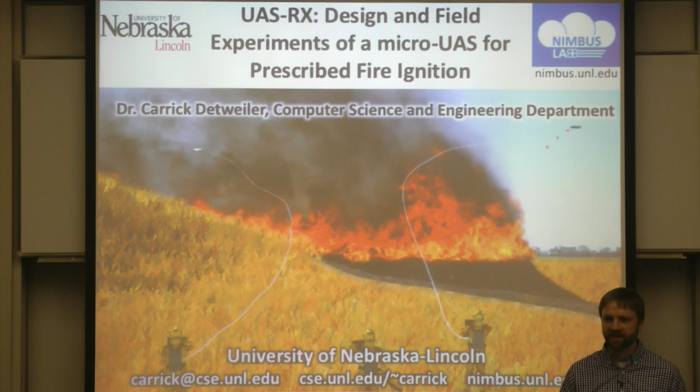Thanks, Steve. My name is Carrick Detweiler. I'm an associate professor at the University of Nebraska. Today I'm going to start out by talking primarily about some recent work we've been doing in actually starting fires with drones. But before I talk about that—and we're trying to start fires for good reasons—I want to give a little background on wildfires and prescribed fires and why these are challenging and important things to work on. Then at the end of the talk, I'll also talk about some other work we're doing in my lab related to field robotics, but also some techniques we've been developing on the software engineering side to ensure that the software we develop as roboticists actually does what we want it to do, and that we can quickly identify and correct any bugs we may introduce.

So a little bit about wildfire. This is a huge problem in the United States, also worldwide. It's a growing problem. You hear now, not just in the summer but all year round, about wildfires, especially out west, that are just decimating areas. It's extremely dangerous, not only for the property and people who are there, but also for the firefighters who are involved.

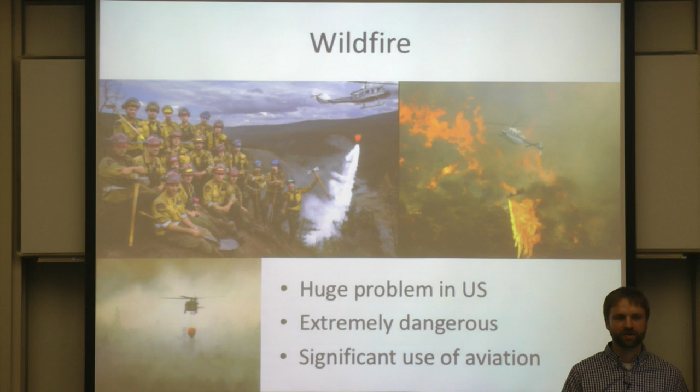They make huge use of aviation—about 20% or 25% of the costs of fighting wildfires relate to aviation. These are wildfires, so things that are basically caused when somebody throws a cigarette out of their car, or forgets to really put out their campfire, or just parks their car too long over a grassy field, and the heat from the car can ignite these wildfires. Lightning strikes are the natural causes.

Wildfire is something that naturally occurs and has occurred, and now we're actually seeing an increase in use of prescribed fire, which is where you're on purpose going out and lighting fields on fire. In part, this has become an important land management technique, because this is what naturally happened—lightning would strike and fields and forests would burn, and this would happen on a 5 to 10 year cycle. So every 5 to 10 years, most of the forests in the western part of the country and all of the grass in Nebraska would be burned off, and this was just part of the natural ecosystem.

But as people moved into these areas, we don't like fire. We try to stop it. And this has led to these bad effects. So the increase in wildfire, while it's also coupled with global warming, is also tightly coupled with the fact that we've prevented fires on these lands for too long.

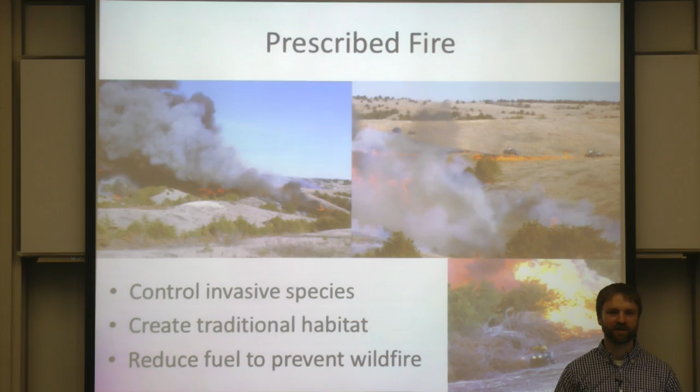In Nebraska and elsewhere, it turns out there are a lot of invasive species that were previously managed by fire. In these pictures, all of these green trees are red cedar, considered an invasive species in Nebraska and elsewhere in the Midwest. They would basically grow everywhere if we didn't spend a lot of time mechanically cutting them down, or the better way to get rid of them is to burn them, because they burn quite readily. So fire, while it can occur in what we consider wildfires, which are often viewed as bad, is a critical part of the ecosystem, and now we're seeing increased use of prescribed fire as a way to manage these.

But there are significant costs associated with these. Fighting wildfires and using prescribed fire costs about $3.7 billion a year as a country. But if you look at the larger economic impact, it goes anywhere from 50 to 100 billion to, some say, $200 billion of economic impact in terms of houses burned down, but also the resulting impact of having people evacuate. So this is huge cost.

As I said before, 20 to 25% of the costs here are associated with aviation, and in part that's a high cost because getting a helicopter out there is very expensive.

While they're very expensive, these types of helicopters and crews are often not available when you need them, just because there are so few of them. And beyond the economic and property costs, this is a high-risk activity. 15 to 20 people die each year—firefighters fighting fires, but also firefighters lighting prescribed fires, which is relatively safe compared to fighting wildfires but still dangerous. About 25% of these deaths relate to aviation.

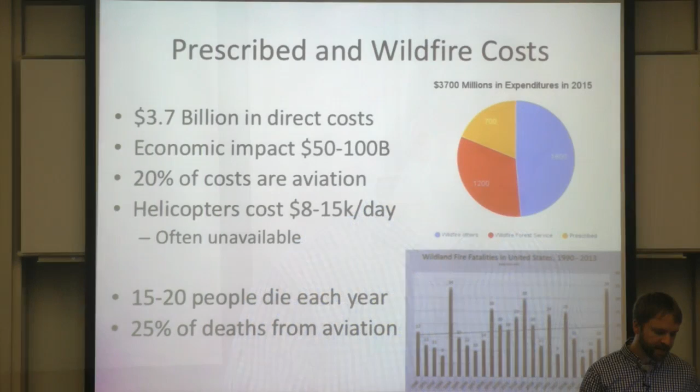So what we've been working on is the development of an unmanned aerial vehicle that can really try to remove people from these dangerous situations.

So this is a prescribed fire that we worked on with a group of landowners. Here, in this area surrounded by fire, all this dark is the smoke from the cloud—this guy is driving an ATV with a drip torch to ignite this interior portion of the prescribed fire.

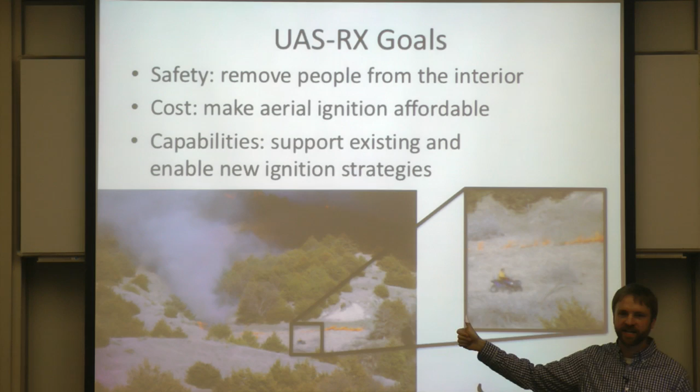So this guy, okay, these people like to do this, some of them. Actually one of the firefighters told me he'd either be in jail for being a pyro or he gets to light fire as his job. So some of these people like to do this, but this is extremely dangerous.

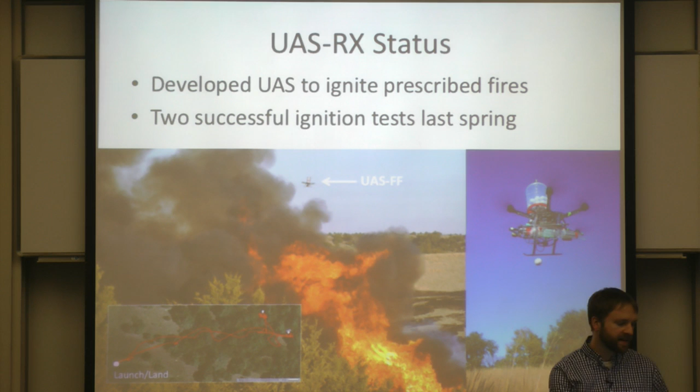So what we've done is developed this UAS, or UAV, that can actually ignite these prescribed fires. Last spring we did the first successful outdoor test of this—the first test ever of an unmanned vehicle to actually ignite fires. What I want to talk about today is a bit about how this project got started, and then go into some details of our field trials and how the design of the system has evolved over time.

Hopefully as field robotics people, or just people interested in robotics in general, you can learn a little bit about the evolution of this and how this project came to be. And then I'll also talk about a few other projects and what we're doing in the future.

So it turned out that the way we got started on this project was actually related to a different project we were working on: aerial water sampling. This is a video of how you traditionally sample—looking for another invasive species of mussels. They do these little tow net things where they throw these out and look for the veligers, the little almost microscopic baby mussels.

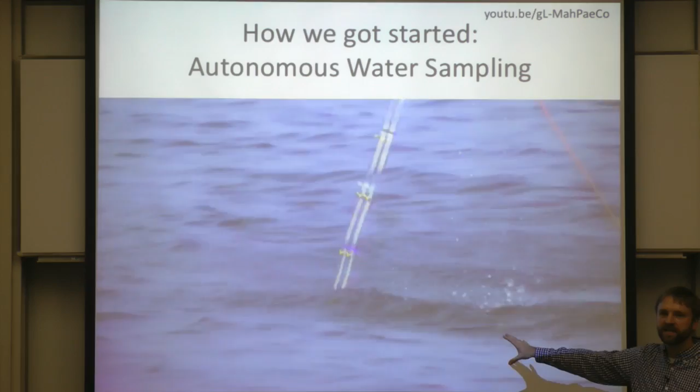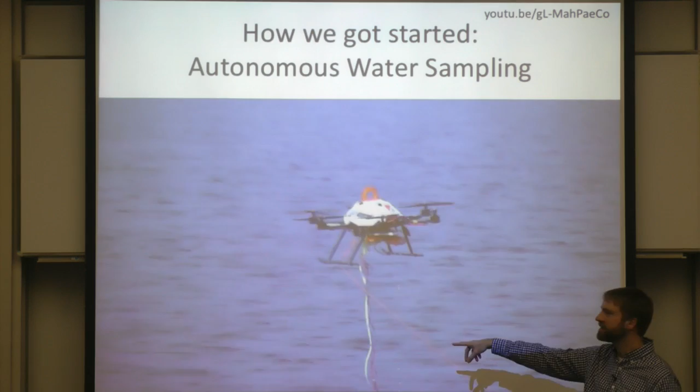What we did in this project was actually develop a UAS that could go out and collect water samples from the air, getting to areas that would otherwise be hard to access. You can't put boats in these waters that you think have these mussels, because then you'll spread it to other ones. So we developed this vehicle that has a pump on the end, and filters the water through a filter that we can then look for the veligers in.

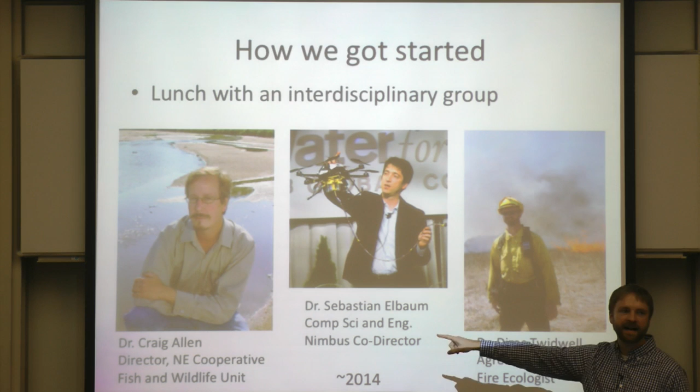It turned out with this water sampling, we were working with Craig Allen, who's a natural resource ecologist. As we were talking over lunch one day after some of our water experiments, he was talking about this other guy, Dirac, who had just joined the university and was a fire ecologist.

And we started thinking about—then my colleague Sebastian Elbaum, who co-directs my lab with me, we were talking about, okay, well there are a lot of dangers in doing these prescribed fire ignitions. Can we do this with a UAV?

My first response was, you're crazy. In part this was because at the time we were just going through all the hassles of dealing with the FAA and doing things the right way to fly legally, and I already had enough paperwork. But we had a few more coffees and lunches together, and decided, okay, this might work.

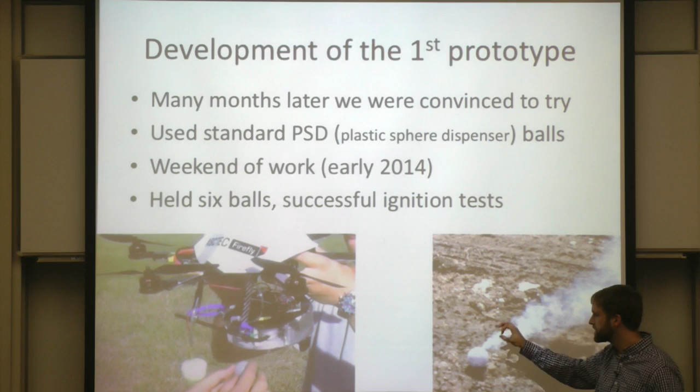This could work. So a while later, we basically quickly prototyped a system to actually do ignitions. One of the things we did was use these little spheres called PSDs, or plastic sphere dispenser balls. These are ping pong ball sized balls that have a chemical inside, potassium permanganate, which when injected with glycol, about a minute later causes a chemical reaction and fire.

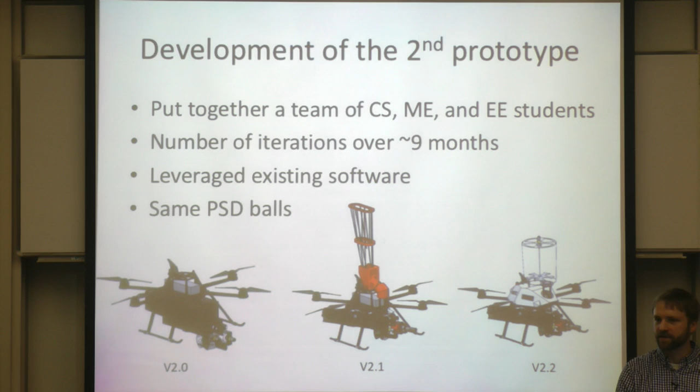These are actually used commercially by full-sized helicopters dropping these to light prescribed fires and also for use in wildfire fighting, so these were known by the firefighting community. We developed a quick system to try to deploy these and do some ignitions. It worked. After that, we started developing—we had some people involved and developed a number of different prototypes of the system over about 9 months or so, and then started doing some tests of this indoors.

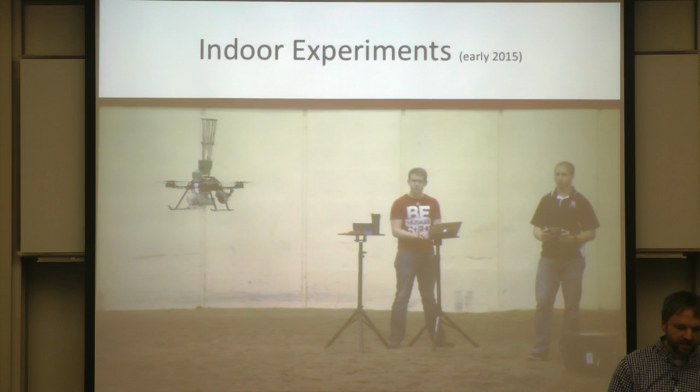So you can see that's the fire from these PSDs. We were working on the hardware, but also the software. How do we do this robustly, reliably?

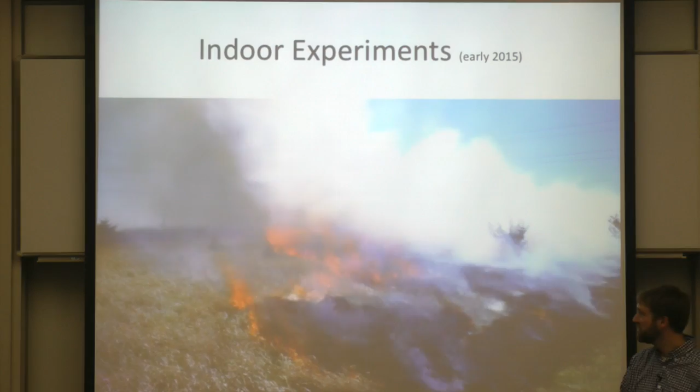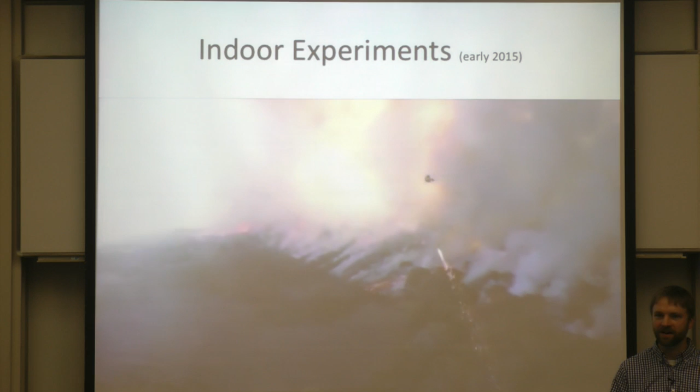This is just showing how it's done traditionally with these drip torches. They're just manually lighting fires, putting it out. This is also just to give you a sense of the full-size helicopter, one of the ways they do it at large landscape sizes.

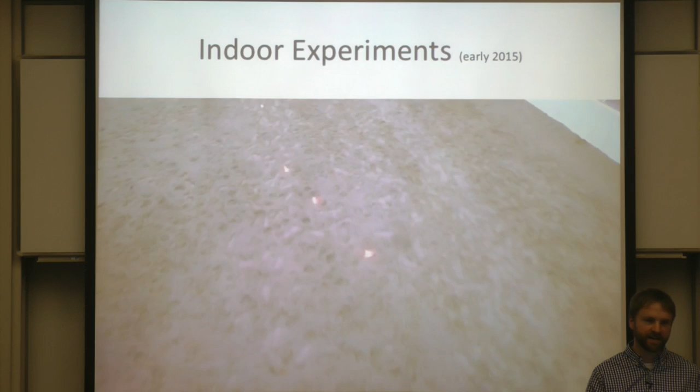We did some indoor experiments in early 2015, looking at how we can coordinate multiple vehicles, do some of the planning and system navigation. This was all for prepping for our outdoor experiments, so we did a lot of testing indoors, a lot of evaluation, seeing what works and what doesn't.

But then when we were saying, okay, we want to go do this outdoors, it turns out that you have to get a lot of permissions from all sorts of people to make this happen. This was both working with land managers, people who are actually doing this, and they were really excited and engaged to make this happen. But we were going to do this on some federal land, so it turned out we had to get permission from everyone, including NASA.

Seriously, we had to send in a 100 to 200 page document to NASA, because it turns out that the Department of Interior that we were working with has NASA certify the airworthiness of their aircraft. So they don't just do space shuttles and things like that.

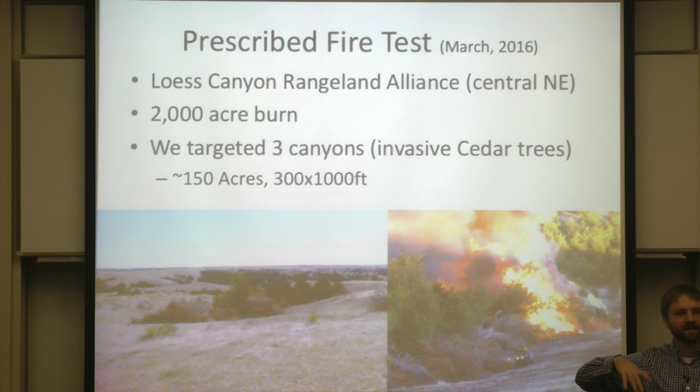This led to our first test this past spring at Loess Canyons, which is in central Nebraska. This is one of these areas where they have a lot of these invasive cedars, and landowners in this area get together and have these burn associations where they go through and do these prescribed fires, trying to get all of their land burned every 5 to 10 years.

This was a 2,000 acre burn, which is a pretty good sized burn - about 2 miles by 2 miles roughly. We were targeting just a little small part of it, about 150 acres, and this was at the very end of their burn, where we were then igniting these canyons.

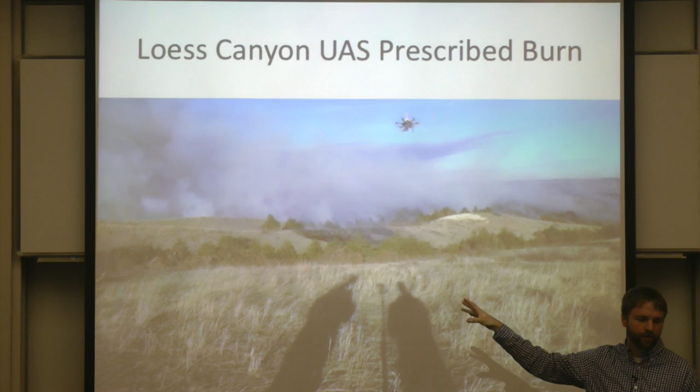Here you see our vehicle, now the second version of this vehicle, flying out about 400 meters to this ravine, which you see here. This is actually fairly deep, and the other way they do this is basically they send a person with a drip torch down there with an ATV to do the ignition.

This is something that can be very dangerous for people who are driving there. Most of the time it's perfectly fine, they can do it quickly. But if the ATV breaks or something happens, they tip over - these things catch fire very quickly, and you have very little time if something goes wrong.

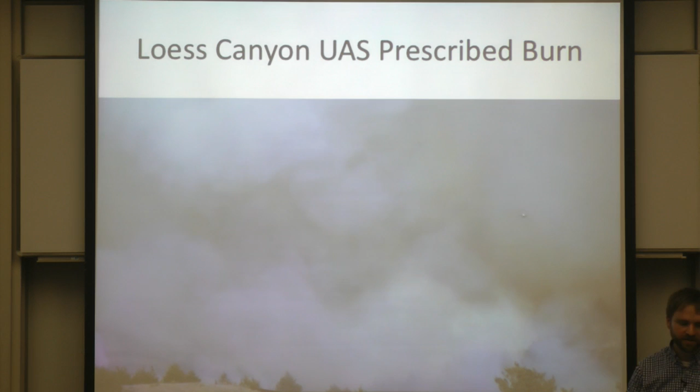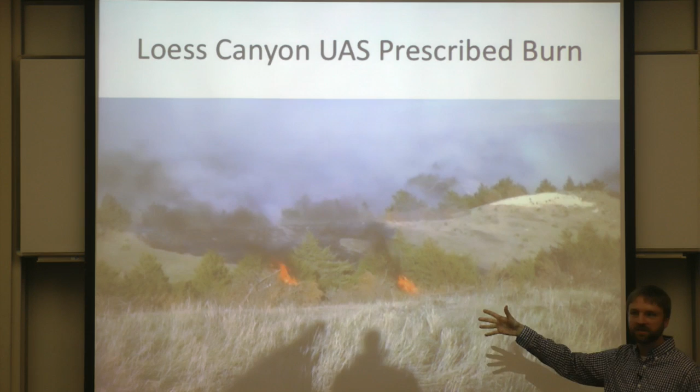Here you can see, with the smoke in the background, the vehicle going along. Then towards the end we come back, and this is actually the fire that we started, now going up - this is a few minutes later. So we dropped some of these ignition spheres, came back, and about a minute after this we had to move back another 500 meters because those flames get so big and hot that you have to be pretty far away.

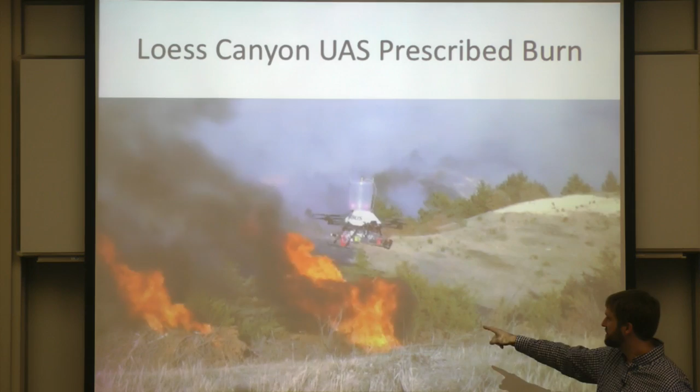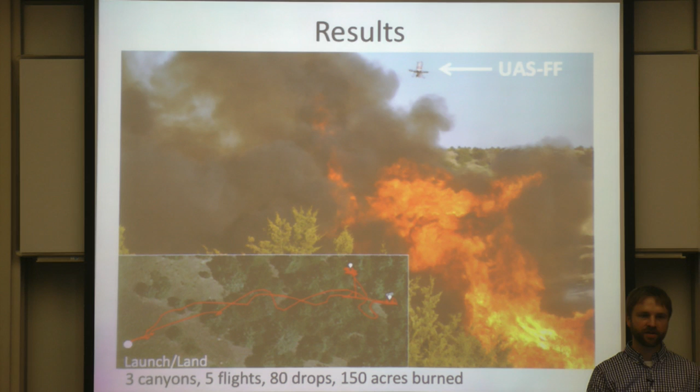So this was our first field experiment where we weren't just doing indoor ignitions or doing drops outdoors, but really where we were actively part of a larger prescribed burn. This was largely successful, but we also learned a lot from this experiment.

A lot of the things we learned were relatively minor - things like the fact that we had to be out there by 6 a.m. and they started the burn at 8 a.m., and they said, okay, well you'll probably start a few hours later. Turned out the wind had shifted and it took 8 hours for us to get started. So we were all set to go at noon, and then we didn't start until about 6. So a lot of these things, but then we just had about 10 minutes before they wanted to continue on - a lot of this hurrying up.

It turns out that for most of these landscapes, you just drop one of these ignition spheres and it'll start. We were thinking we'd need to drop dozens of them. Our major lessons learned were, obvious in retrospect, things like dust and dirt, and we were using a system we'd already injected hundreds or thousands of balls with.

We had some jams at the end, so those were some problems. The other thing we learned, which we modified for the next version, was that largely the way these people work is they point. They say, we want fire over there, no, a little left. So for this third version, the second field test, we developed a very simple interface for much easier pointing from the burn boss.

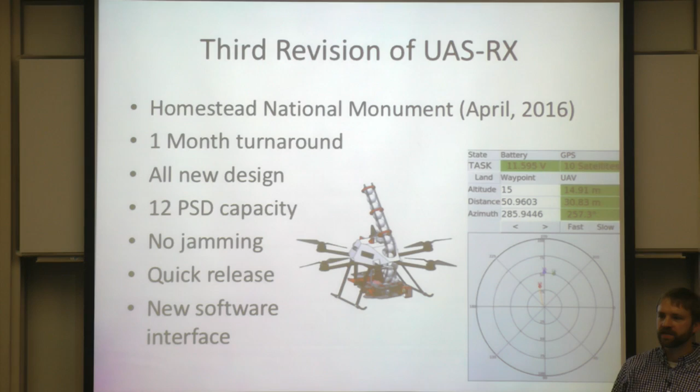This was for a test basically a month later. We ended up doing an almost complete redesign of the system to eliminate jamming, updating software and other things. This was for a test at Homestead National Monument, a national park in Nebraska. There were a whole bunch of firefighters involved, but this was really them letting us evaluate our system versus how they normally do it.

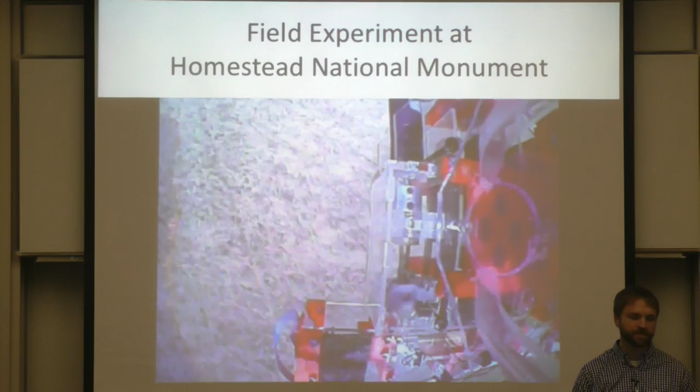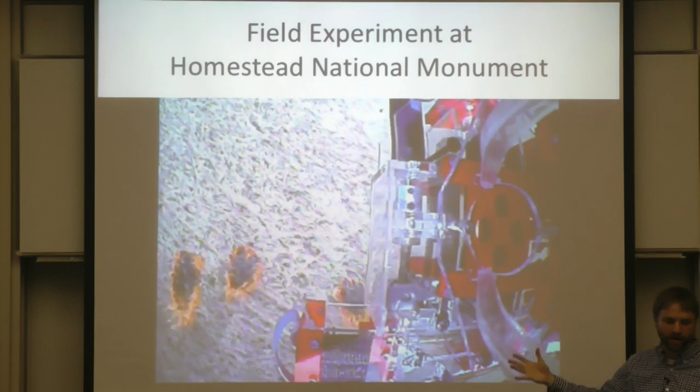Here you can see the vehicle dropping the ignition spheres. This is a view from an onboard camera where it's injecting and puncturing the ball and dropping it, a useful view to see where you're actually dropping these. But then also this is flying back afterwards to see how the fire spread from these balls. This gave us information on where we were, whether all of them ignited, and how long it takes to actually spread, these types of things to help us characterize it.

One thing we learned again is we're not quite fast enough. We had much fewer balls, since from our first experience we didn't need as many ignition spheres as before, but that meant we were coming back to reload more frequently. We had it down to just about 2 minutes to reload and launch the vehicle, but even that is not necessarily fast enough. So next time we go out in the next few months, we'll have a pair of vehicles so we can have one ready to go immediately upon coming back. Also, interfaces can always be improved.

But the good thing is we didn't have any jams. We didn't have any problem with dust and dirt and contamination causing problems. So this system has now become much more mature and has been doing well.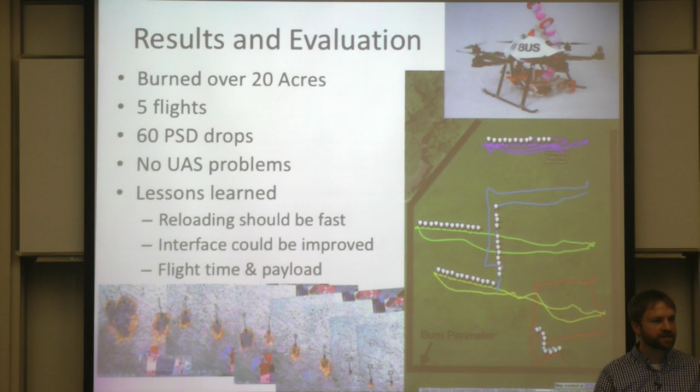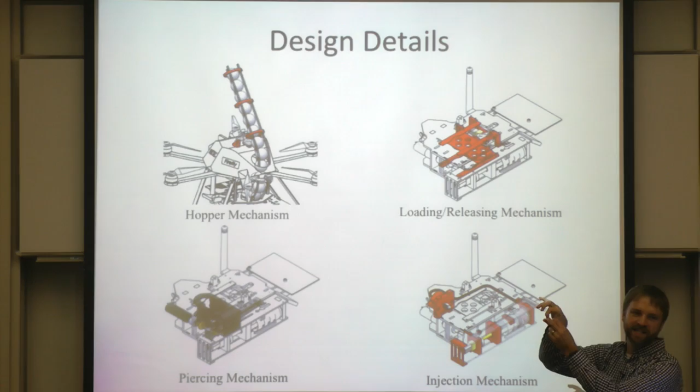Let me give you a little overview of some of the design details. There are a few main components. There's the hopper that actually holds the balls, and it turns out these are interesting balls to dispense because they're ping pong balls, but they have a little, basically like sand, in the bottom, so they don't roll easily because of the dynamics of this non-uniform ball. So we've gone through a number of different hopper mechanisms. One key thing is just having a quick release on the system, both for us to quickly remove it, but also in case there is an unintentional fire, we can remove it or drop it quickly.

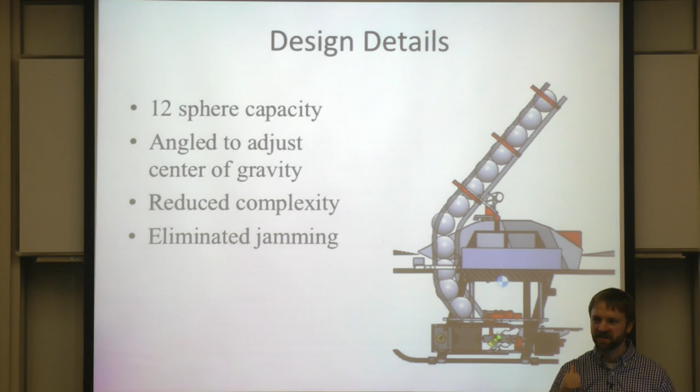Piercing: these balls are such that you can stand on them on concrete and they won't buckle, so it requires quite a bit of force to actually pierce them to inject the glycol, this liquid, into it. Some of the things we did: we went from our prior prototype, which could hold about 40 ignition spheres, to one that just held about a dozen. One reason was flight time-wise, we didn't gain much by adding more. But small things in the design, like having the center of gravity over the appropriate place, make this work well. This video shows a little bit of the system.

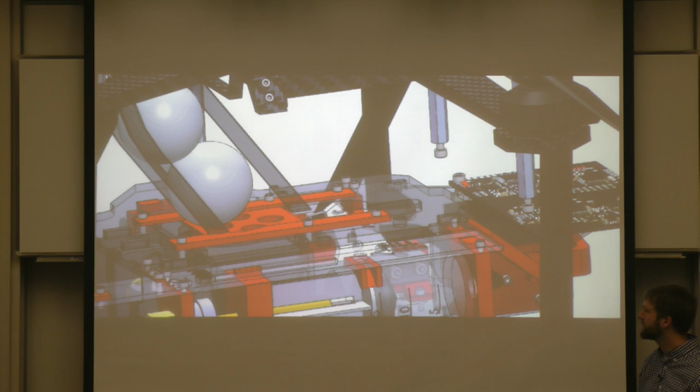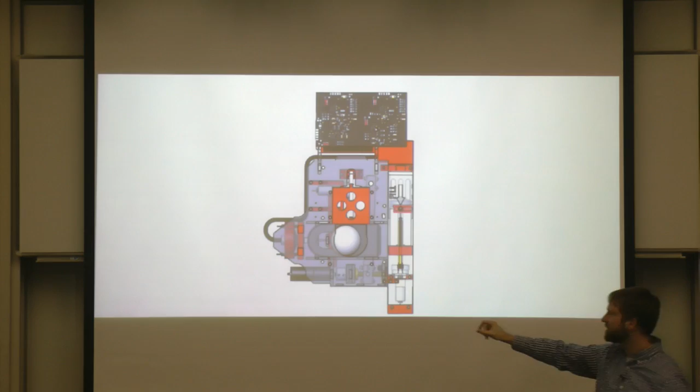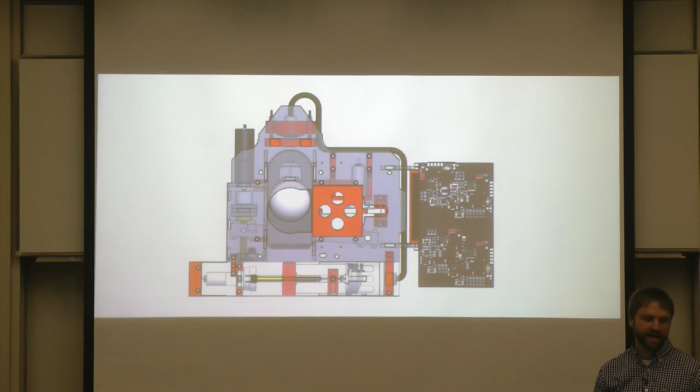So again, this is a modular system you can easily attach or detach. Then we have this mechanism to load the next sphere in, and we drive this ball onto a small needle, and then we inject it with the glycol to actually cause the ignition, which happens about a minute after the injection. So we have time, about a minute, to get it out and drop it so we can safely move on to the next location.

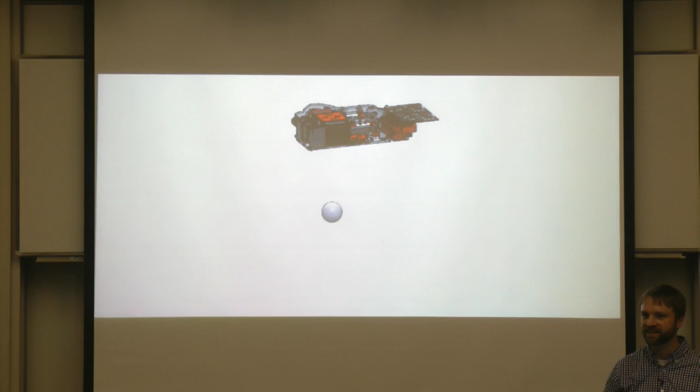A lot of this, we did the first prototype in just under a week, a few days of prototyping, and then we had a number of iterations. A lot of this was built on the software and systems we've developed in the Nimbus Lab, which I co-direct and co-founded. Now we have maybe 20 or a little more students in the lab, and a year and a half ago we hired 2 new faculty, so there are 4 faculty co-directing this lab.

Really our goal here is developing this type of UAS system to get closer into and interact with the environment. What I want to do now is shift a little away from fire and talk more about water sampling and some of the other projects we've worked on in the lab that really laid the foundation that enabled us to fairly quickly develop the prototypes and evaluate the proof of concept of the fire ignition system. So, as I said at the beginning of the talk, this really came out of a project we were doing on water sampling.

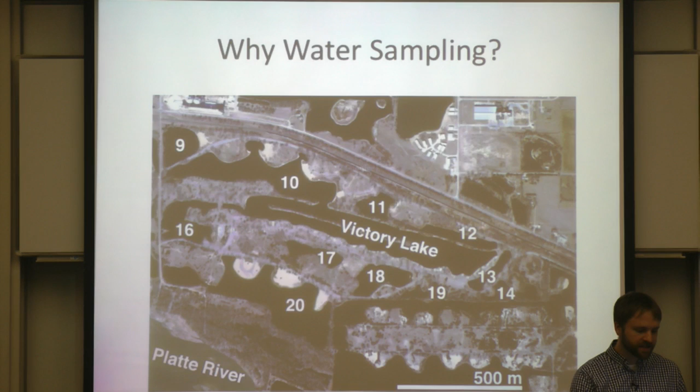So this is a very labor-intensive process to collect water samples. There are automated samplers you can deploy, but they're quite expensive and still require regular maintenance and somebody grabbing them. So they still largely rely on manual sampling of these lakes. Some colleagues of mine who are water scientists were doing this, and it was taking them 12 hours to collect samples from these 20 lakes. Most of that time was actually putting the boat in the water and taking it out to get to the middle of the lake where they could collect a clean sample. Very little of it was actually the sampling time.

So what we did is we actually developed, again, a UAV that could go out and get close to the water and collect water samples.

The challenges here were both in the mechanical design, which I'll talk about more, but also in how you safely fly close to the water where the onboard altimeter isn't precise enough. You have a lot of errors and sensor noise, and the cost of failure is high, because if you don't get things right, you fall in the water.

So we were also focusing a lot on developing software tools that would automatically analyze the code we were writing, as well as the system performance, to enable this autonomy.

Just to give a mechanical overview of the system: we have 3 water sample chambers in this configuration, and a little needle that can rotate to each chamber to fill it. Importantly, we also have the ability to go between sample chambers to purge, so contaminants in the tube from one location don't contaminate the next sample. Going from these little lakes, you can hop from one to another, park in the middle of the area, and reach all of them, making sure to purge between samples.

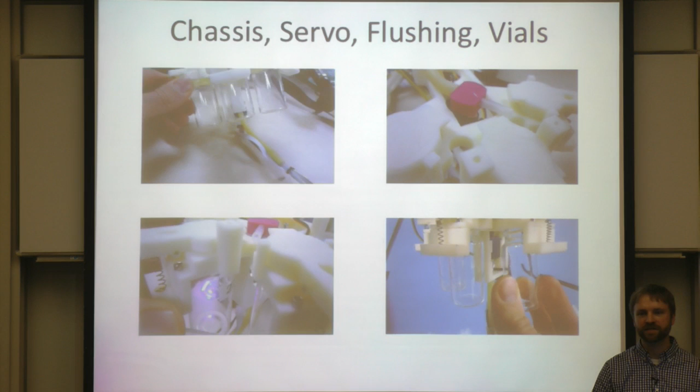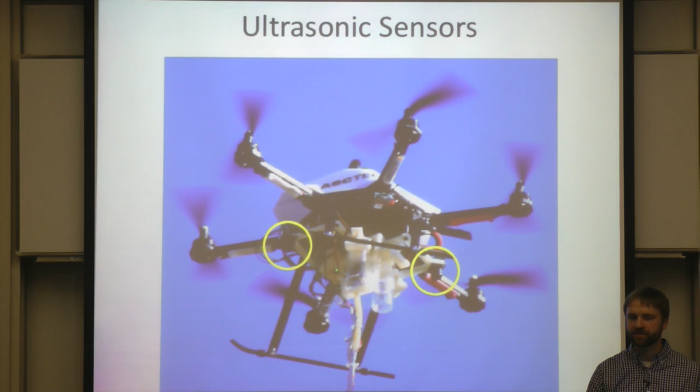These vials are quickly changeable, so instead of taking 12 hours, it's possible to get sampling down to just a couple of hours. We have a lot of sensors on board, including a pair of ultrasonic sensors for range finding, and some exposed wires that let us measure conductivity, so we know how deep the tube is in the water, using a low cost, easy to use method.

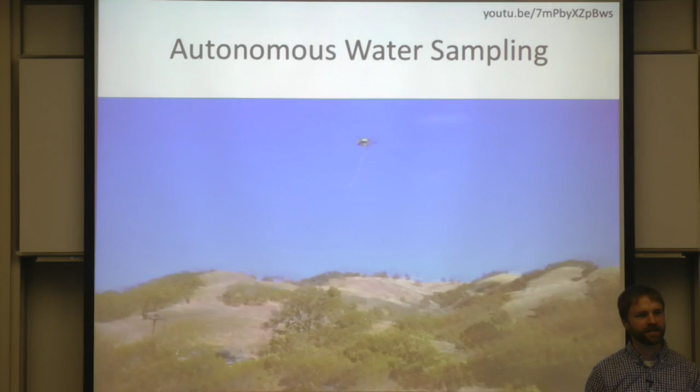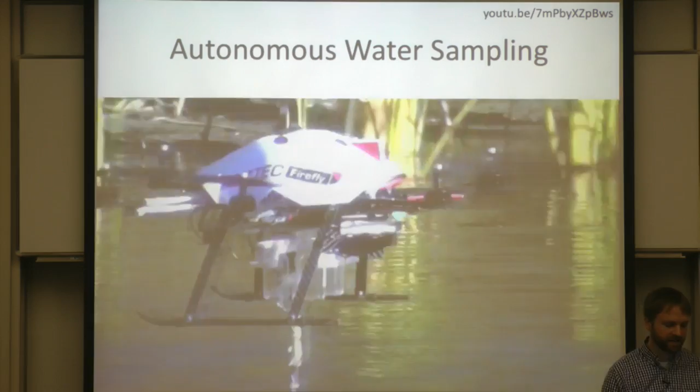As you saw in the video before, we've done a lot of field experiments with this system to collect water samples in a semi-autonomous way, where the scientist says, I want to sample from this location, and the vehicle goes out to that location, down to the water at the right altitude, and collects up to 3 or more water samples depending on the payload configuration. Here you can see the vial filling as it goes.

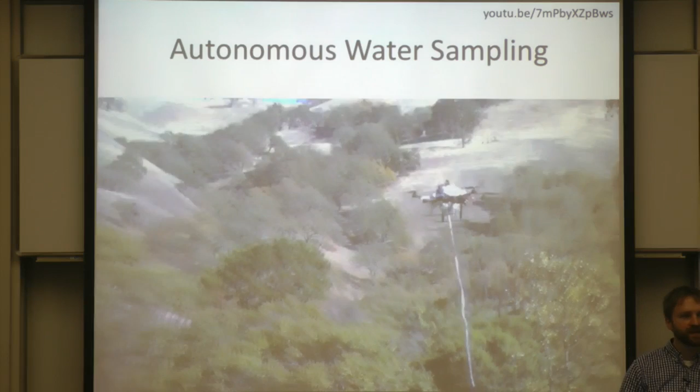This project started a few years ago, and we've worked with a lot of water scientists, including collaborators at UC Berkeley. This is an experiment where they deployed HOBO sensors in static arrays, and we compared measurements from those sensors to our measurement locations taken over time.

In this system we weren't collecting water samples but measuring the temperature profile. From the air, we're able to measure from the surface of the water down 2.5 meters to get the temperature profile, and from that reconstruct a 3D temperature map of the system.

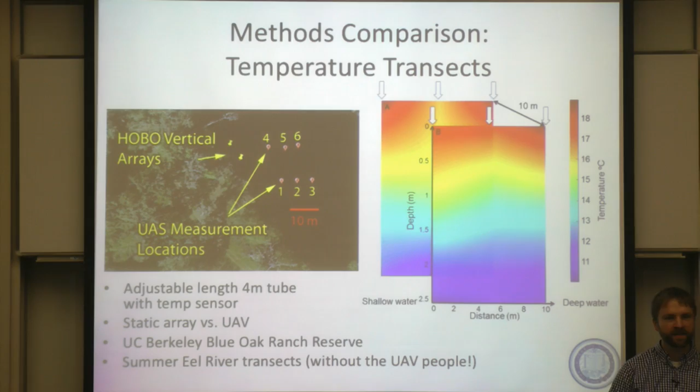What's really exciting is that after we did these experiments with them, this past summer and fall their team was actually out there, without any robotics people, flying a UAV and collecting temperature sensor readings. For me, that was the point where I said, okay, we succeeded in something - if we can get the water ecologists, the actual scientists, out there flying these systems and collecting meaningful data, that's a real success.

We've also done more controlled experiments with the University of Kansas, where they have tanks in various configurations that we could somewhat control. We had control tanks, but also tanks where we pumped salt water into the bottom to create a strong conductivity gradient, and others where we put big blocks of ice at the bottom to get a strong thermal gradient.

We went out and did comparisons with our UAV versus the traditional method, using static sensors in place versus putting a sensor in manually. We did this at the controlled tanks but also at a larger pond they had there, and it turns out we're almost an order of magnitude faster than traditional methods for these types of systems. This involved a whole lot of flights, 60 flights in a couple of days doing these experiments.

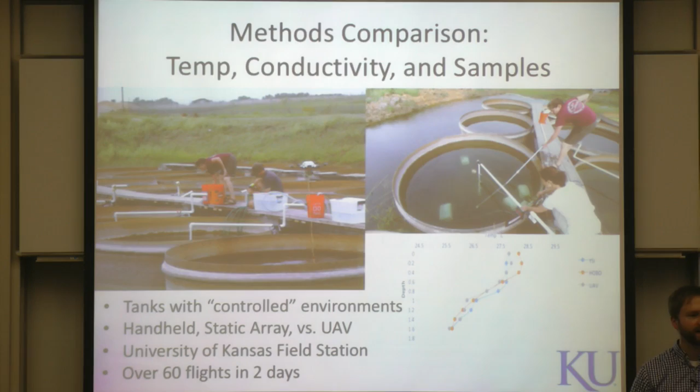This is one of the projects that had some direct lead into the development of the prescribed fire vehicle, and a lot of the software and systems we used were about the same.

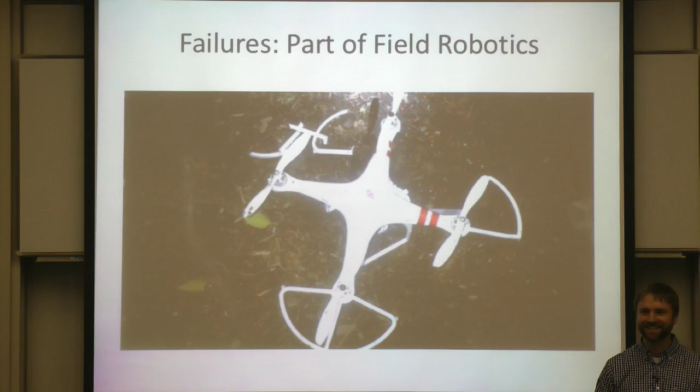So failures, I say, are part of field robotics. So who's had a robot crash or fail? Okay, come on, everybody, right? So we've also had our fair share of crashes.

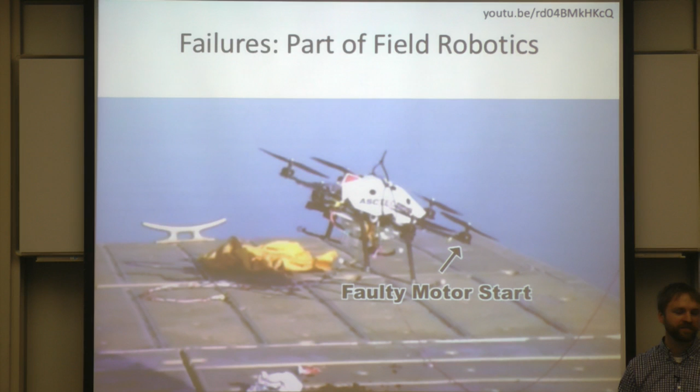So this one, motor failed to start, and we were using this great hex rotor with propulsion redundancy. If the motor failed mid-flight, it would still fly. We tested this. It turned out that they had a bug in their software that on motor start on takeoff, they were not checking to see if a motor failed. So their software returned a yes, motor's working, motor started, flag to our software, and we took off and crashed.

So this is one of the things that has motivated a lot of the other work that we do in the lab, which is trying to avoid and identify failures in robot systems. And I think there are a lot of reasons that robots fail. So hardware or software, these are definitely two key things.

Environmental conditions. I like to tell my software engineering colleagues that I'm a perfect programmer. I never have any bugs in my software. But okay, that might not be true, but I think a lot of failures in robot systems are just not understanding the environment you're operating in. So there may be unexpected things that happened. It's too windy, the lighting is incorrect, things like that.

The first prescribed fire system, when I built the system, I had used a little IR detector as an encoder to know when the ball was in place. Well, we went outside and it was really bright out. The sensor was saturated, it didn't work. Fortunately, we had a roll of duct tape, could cover it and make it all dark, make it work.

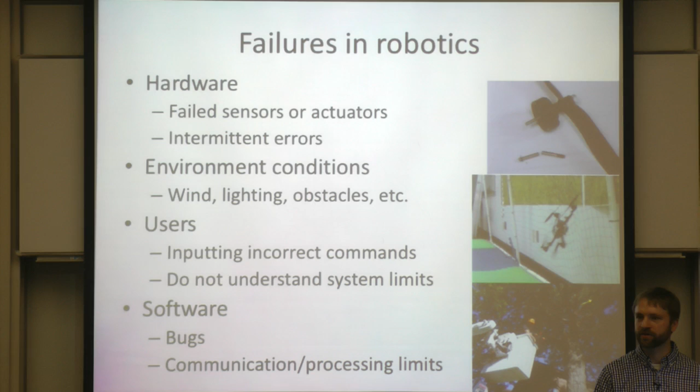But there are a lot of problems, including things like users inputting incorrect commands or just not really understanding the limits or the parameters for systems. So one of the things we've done is develop tools to help debug some of these complex systems.

So we just did a little survey, and the Arducopter, this open source platform for UAVs, has about 622 parameters that the user can configure. And this is not the developer can configure, this is the user, okay? Now similarly, ROS navigation, when we did this, had 220. Okay, these are a ton of parameters, and I don't think I could know what 600 parameters mean if I developed the system, let alone if I'm picking up somebody else's software.

And it turns out that 10 to 30% of questions on the Arducopter forum involved questions about what this parameter means, or why this isn't working, and someone says, oh, you just need to tweak this parameter. So there's lots of these parameters that just need to be tweaked. So what we did was develop a software tool that let a human and some automated software tools we developed interact to actually help figure out which parameter might be causing problems.

In this work, what we did, just to give you a brief overview, is we developed some tools for ROS that could automatically analyze the code and figure out where there were parameters, ROS param sets and gets, and things that the user was using as thresholds in the program. And then what we could do is, while the system was executing, while the robot was flying or driving around, the end user could then mark two types of errors.

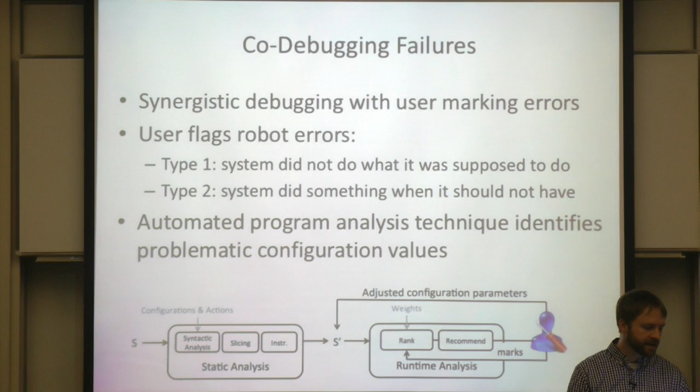And what we did is, just using those two types of tools, we've developed the software that can then basically, when the user flags this as a problem, the software then goes and says, okay, are there any thresholds that may be involved based on these configurable parameters that could be causing this problem?

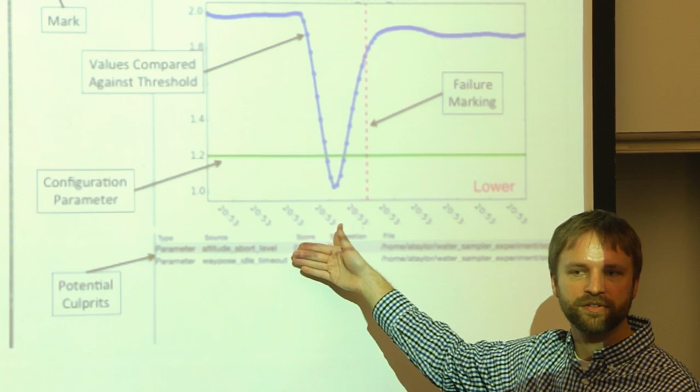So here, this green line represents this configuration parameter. The sensor value relating to that threshold was going down. It crossed it, and at this point later, the user marked an error. So this means maybe this threshold should have been set further down so it didn't get crossed. We're automating this analysis so the user can mark errors, and the system automatically comes back and presents, okay, maybe it's one of these two parameters that caused the problem. We've only done relatively small studies so far, but users are able to correctly identify which parameter caused problems.

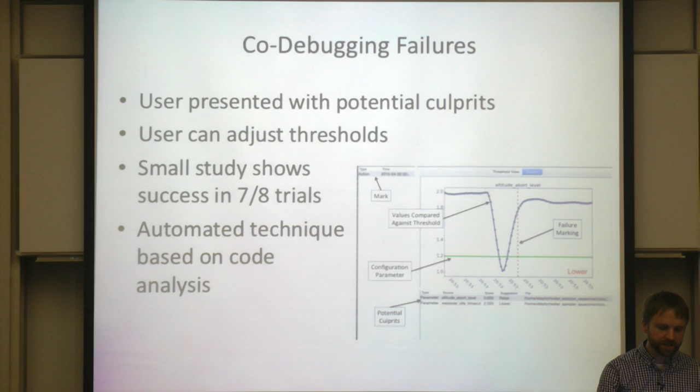We're also developing techniques for identifying sensor rates and how they propagate. So what happens when you go from a 30 hertz frames per second camera to a 60 hertz camera? What nodes in your system in ROS does that impact? Do you have to consider the effect of this on your whole software system? Probably not. We've developed tools that say exactly which parts of the system you should analyze to see how this rate change could impact it.

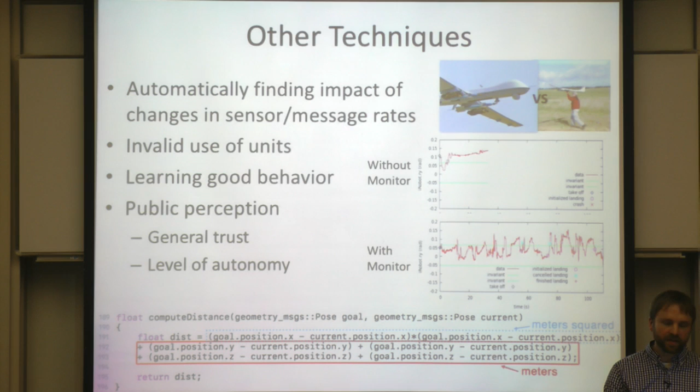So in summarizing some of this work, I think a lot of the focus is on what you can do with UAVs when you get closer into the environment. We don't just fly high and take pictures. There are interesting things you can do with that, but once you get into the environment, it's a lot more challenging, but also interesting to work in. I think this is where UASs will transform a number of new fields in the next 5 to 10 years, when they really start interacting with environments, like a lot of the work here navigating challenging environments with vehicles.

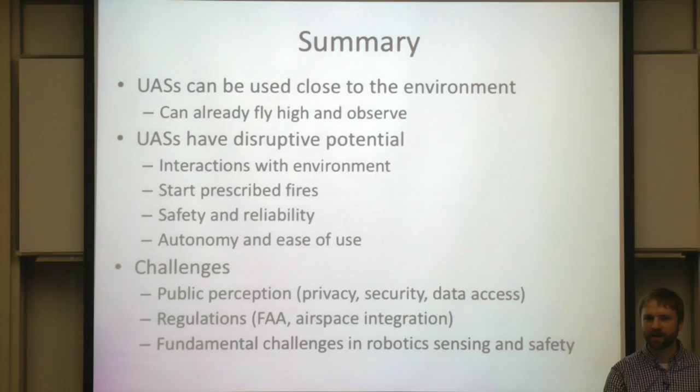I think there are also real challenges with this in terms of public perception, privacy, and regulations. Things are changing, often or sometimes for the better, sometimes for the worse, in terms of what we can do with these things. But I think it's important—we're doing some studies on what the public perception of these vehicles is and tracking it. So we've done surveys the past 3 years to track how public perception of drones has changed, and to see how this will evolve over time.

Just a little bit on how we're moving forward. We're going from the vehicle down here, the Firefly from Ascending Technologies that we worked with last year for the prescribed fire, to a Matrice 600 for tests we're doing in the next few months. Much higher payload, so we'll be able to fly for 30 minutes, dropping hundreds of these ignition spheres to do ignitions on larger systems.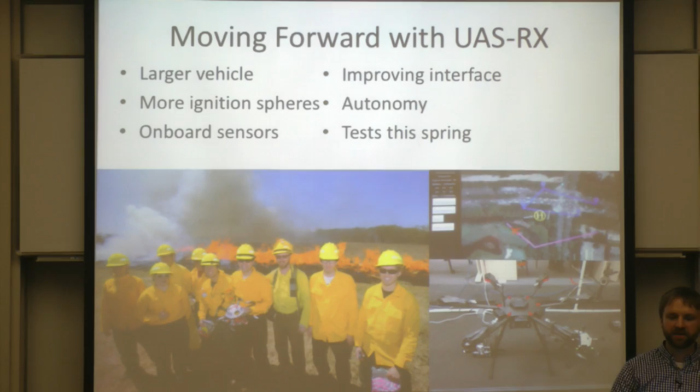Also integrating map interfaces in addition to these pointing interfaces, to give users of the system a lot more flexibility. On the computer science side, we're looking at using onboard sensors, actually measuring the temperature gradient in the air with temperature sensors, to try to detect if we're flying into a plume of smoke or hot air that could cause navigation challenges to the vehicle, or actually burn up the vehicle if we're too close. So we're looking at how we can detect that and replan where we should be going, in part to move towards increasing autonomy within the constraints of the prescribed fire and wildfire community, which are sometimes slow adopters of this technology.

We'll be doing more tests in the next few months. We have a lot of burns lined up, so I'll know more by summer how things go. And of course, there are a lot of people to thank, not only for the prescribed fire work, but everyone else.

And then I have just one question. Okay, so who are the computer scientists and who are the firefighters? That's my question.

Okay, yeah. So next time before I go out, I'm going to roll around in the dirt. So that's another lesson I learned. With that, I'd be happy to take any questions.